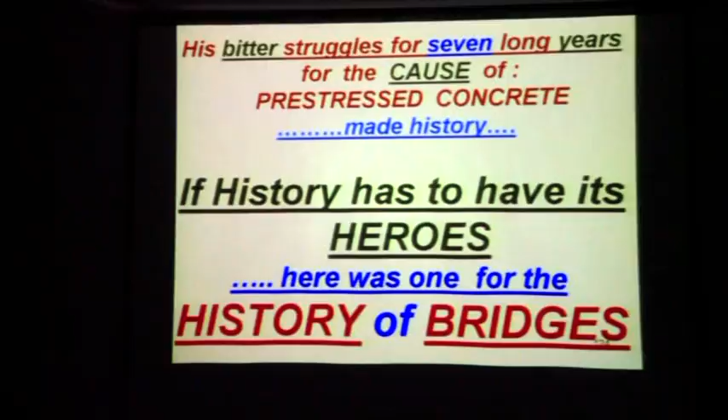Freyssinet took patents in 1928. He was out to sell history's most exciting building material, called pre-stressed concrete, but alas, with no buyers around. The same problem of mindset.

He reportedly told his friend Le Corbusier, in translation, 'I reached my goal, now I am looking around to see what I can use this discovery for, and who will accept it. How do I convince them?' These were his desperate words. And he continues: 'In my opinion, modern society needs it for all their housing and their highways.' This was back in the 1930s.

Corbusier was so touched by the sentiments of his friend that he concluded, of that one short sentence Freyssinet wrote to him, 'He has crammed a vast wealth of poetry, lyricism, solidarity and concern for mankind and for the hearts of human beings.'

In 1960, the beam bridge... can we stop this fellow? It's a little— which switch is this? I don't want to touch them all. I'm sorry, I would have done it, but I don't want to— don't switch off the computer. Oh good, you won. Thank you.

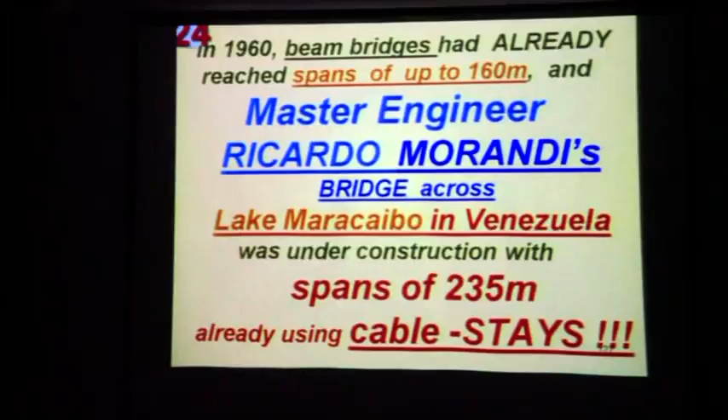And you look at this mastermind—the first person who did the cable-stayed bridge way back then, across Lake Maracaibo in Venezuela. The bridge across Lake Maracaibo, here it is, in Venezuela, was under construction with spans of 235 meters each, about 800 feet, already using cable stays then. Here is the great man.

Professor Morandi—these professors are practitioners more than teachers. They understand the ins and outs of what they are doing. This is his famous bridge across Lake Maracaibo in Venezuela.

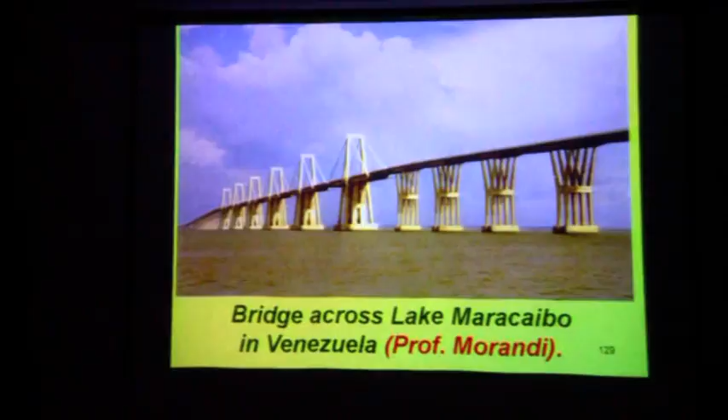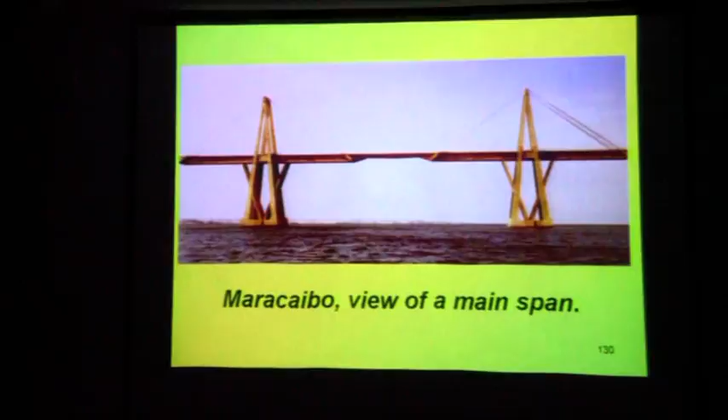This is his famous single-unit, single-element Maracaibo view of the main span. You can see how the stresses would flow: the live load picked up by the beams, picked up by the stays onto the pylon, down into the foundation. Everything is simply supported—not simply supported, but statically determined.

But that was not all—he did all the bridges along the west coast of Italy, on what's called the Sun Highway, the Autostrada del Sole. There are first-class bridges on that. Each bridge is different from the other, and each bridge is more complicated than the other.

Because it is coming from Morandi, nobody could question him. But these are things you can see for a lifetime.

You should go abroad. This morning we had a 1.5 to 2 hour session. I don't know how many of you came, but that's where I was explaining quite a few things.

Remember this, it's not the analysis that you start with. You give me a problem, and you straight away open your laptop and start. Don't do that, that's not the way practice is done. You have to conceive the idea, draw sketches to scale, then transfer those sketches to the drawing board, make them, chisel and chop them, cut them short here and there till it looks like something and you can see the stresses flow. Then you start the analysis, then comes the design. In doing so, you have to fix the cross-sectional dimensions first. That doesn't come by starting your laptop.

Now, why am I saying this? Let me first show you the next one. This is a bridge across the Paraná, the bridge across Chaco Corrientes in Argentina. You just look at this bridge. But the designer who had to conceive it, this is how the conception started.

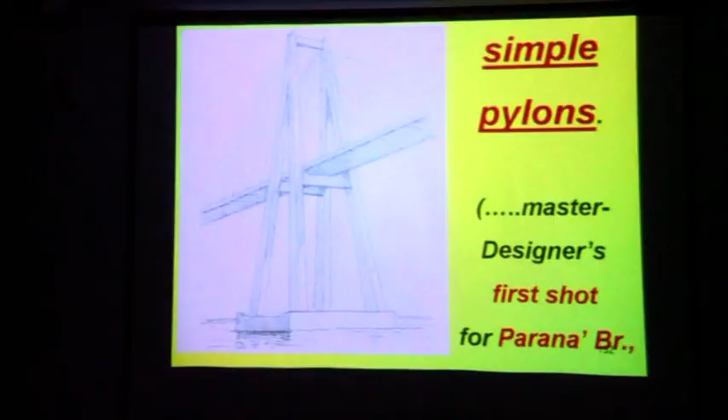That is engineering, not starting with this calculator. You will then begin to realize how the conception of structure and understanding commences. So this is what... I can't use your damn thing, this thing. This is how the conception started, and this is what he did. Just to transfer the idea that please, a computer pile of printouts is useless and meaningless. You have to understand differently.

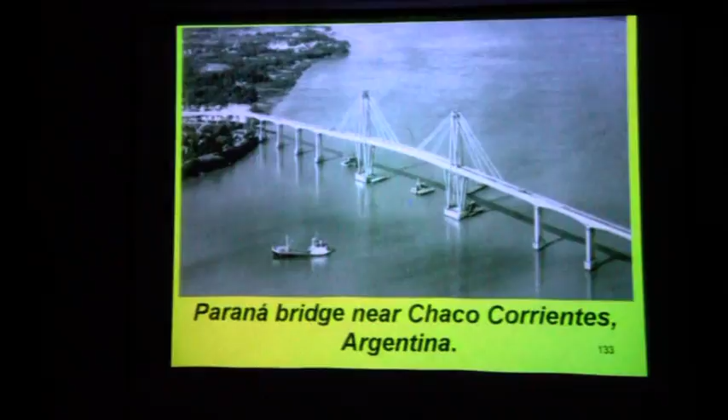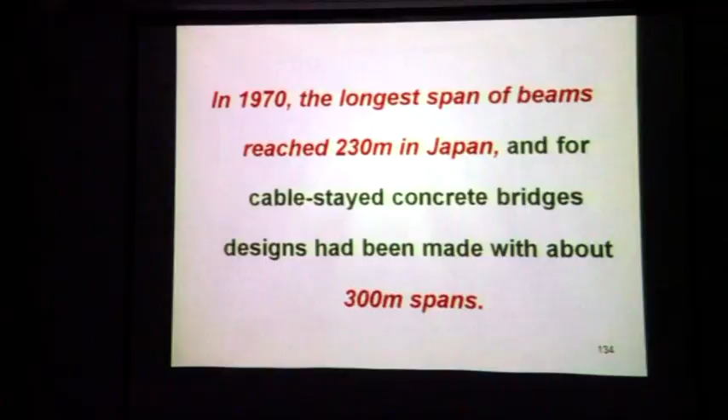In the 70s, the longest span of beams reached 230 meters in Japan. And for cable-stayed concrete bridges, designs had been made with about 300 meter spans then. Today we go up to 500 meters and even longer. But this was back in 1970.

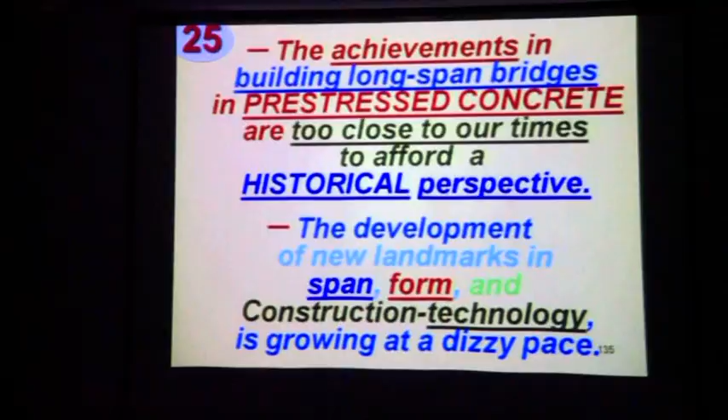The achievements in building long-span bridges in pre-stressed concrete are too close to our times. That is like yesterday, not good old steel bridges of wrought iron and cast iron. So it is not easy to comment on the bridges that have come up in our own, in the same decades as we are living. So that's why I'm saying the achievements in long-span pre-stressed concrete bridges are too close to our times to afford a historical perspective or comment. But the development of new landmarks in span, form and construction technology is growing at a dizzy pace.

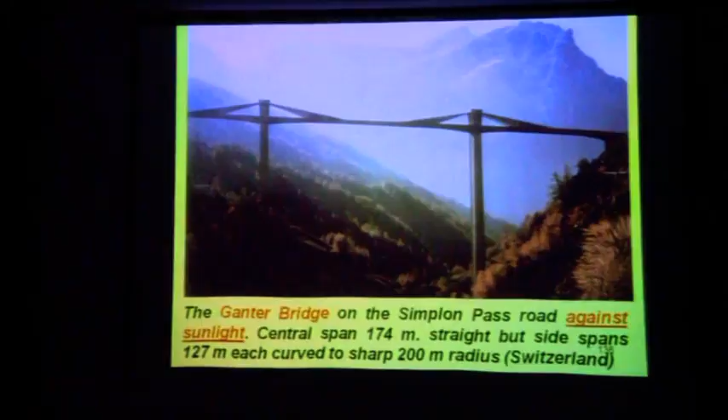Now you see, this is again Professor Christian Menn of Switzerland. This is the Ganter Bridge, Simplon Pass in Switzerland. If you look, this is a picture taken against the sun. If you see the same bridge along the sun, this is how it looks. And imagine if you see these two things this way or that way, when it is snow all around, you freeze. You just cannot do anything other than appreciate.

And he's one of the greatest analysts of the day, Professor Christian. I don't know whether he's passed away yet. I don't know when, but if at all.

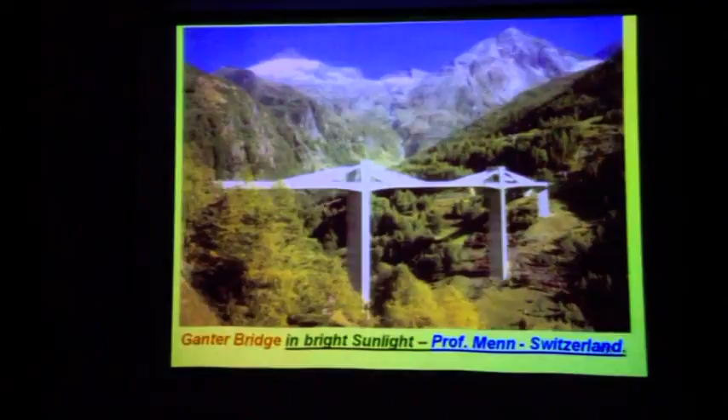Then this is one of the latest, Millau. I used to call it Millau till I was corrected. It's pronounced, I'm told, as Millau Viaduct. This is between Barcelona, between Spain and France, but between Barcelona and Paris. Now see this very carefully, this is not a joke. This bridge is something superb, absolutely superb.

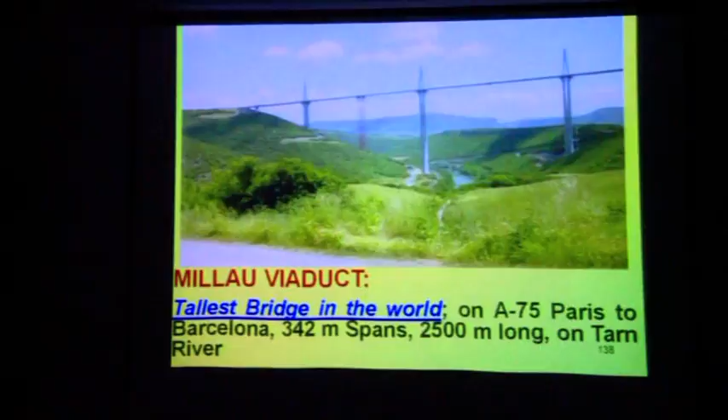This is across the motorway A75. Each span is over 1,000 feet, 2.5 kilometers long, and the pier height is taller than the Eiffel Tower. And I'll show you that. Now you begin to see what this bridge is. Now I'll show you a picture or two of this bridge during construction, above the cloud line.

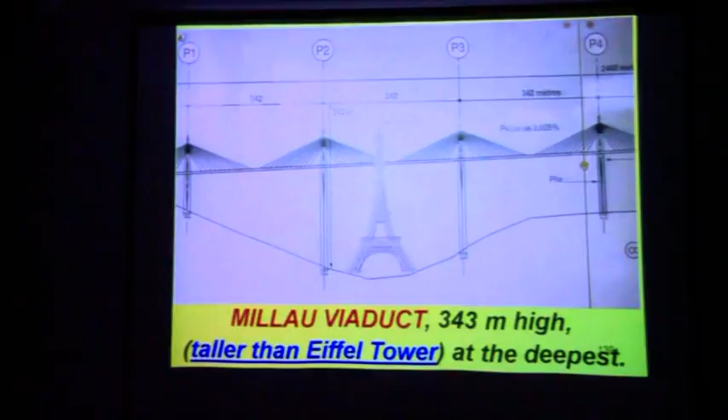Bridges is a great topic. Please take to it.

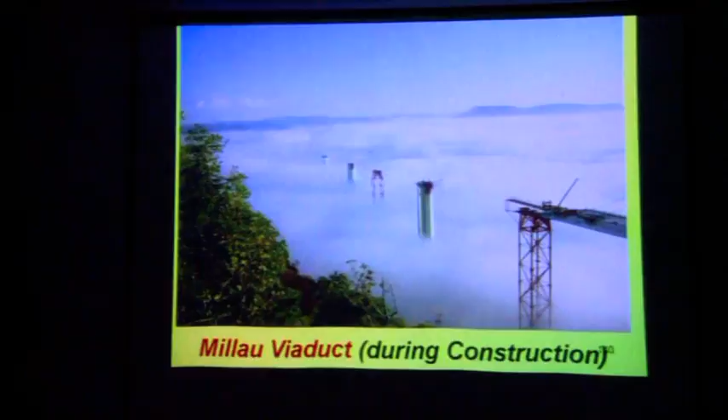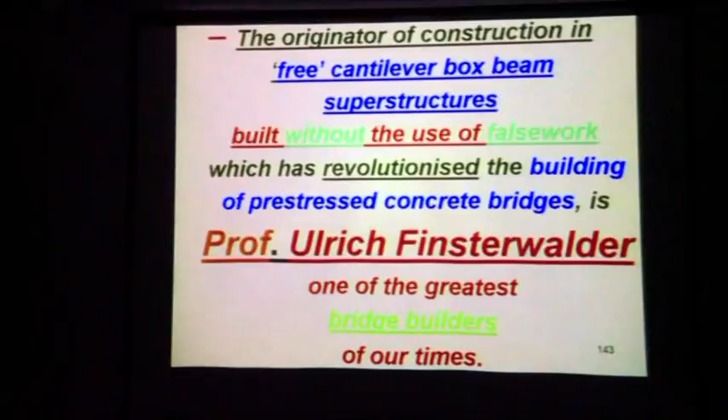The originator of construction in the free cantilever method—because if you have to cross bodies of water where you cannot raise the staging from bottom up, you have to do something else from the top itself. That's called the free cantilever construction method. The propounder is Professor Dr. Ulrich Finsterwalder, one of the greatest bridge builders of our times. Now, here's the great man.

A later modification: he would do segments on both sides, pre-stress them together, then again segments on both sides, pre-stress them together, and keep going outwards from the pier, doing the same from the next pier, until the two cantilevers would meet. But these were all cast-in-situ, cast-in-place segments.

Somebody else came later. He did the same thing, but converted the technology into using precast segments. That was Jean Muller, J-E-A-N, Jean Muller, a disciple of Freyssinet and Guyon's school of thought.

A later modification of this method, cantilever construction with precast segments, was introduced in '63 for the Choisy-le-Roi Bridge in Paris and the Oleron Bridge on the French coast—I will show you—by a contractor, which was a contracting company. The consultant was STUP, S-T-U-P.

It's an acronym—S stands for something, T for something, U for something. STUP Paris, which was owned by Freyssinet. Freyssinet was a great legend. He would give you the problem and he would give you the solution. He wouldn't tell you how, and he perhaps wouldn't even know.

But a great mathematician turned engineer turned mathematician named Yves Guyon used to be with him almost 24 hours a day. He gave mathematical proof of everything that Freyssinet propounded. And he married his daughter as well, because he was there for too long.

This was Jean Mueler. I've said it somewhere—most famous Freyssinet-Guyon method. In '63, the name of the company was Compenon-Bernard, that's the French company, operating under the most famous Freyssinet-Guyon school of thought for bridge culture and thought.

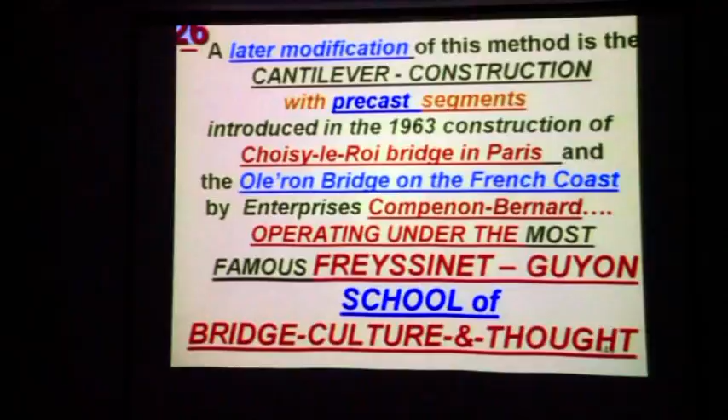This was done by Jean Mueler, who died very recently, 3-4 years ago. This is his bridge. When he lectured on this in England in 1963-64, I attended his lecture.

When you listen to people like these, you are transfixed, because they give you ideas which come into the codal domain maybe two decades later. Like, for instance, what is the creep loss difference between a cast-in-situ segmental construction and precast segmental construction, and the thickness of the joints—whether you should do mortar joints or epoxy joints. Epoxy came later; this was mortar joints.

And the deflection—you calculate in cantilever construction that as you build the cantilevers, they keep deflecting. You can't have a bridge like this, so you have to pre-calculate in advance the possible effect of creep in deflection and introduce those deflections in reverse. That's called the camber calculation. Even today, computers have to be used to predict the correct creep coefficient.

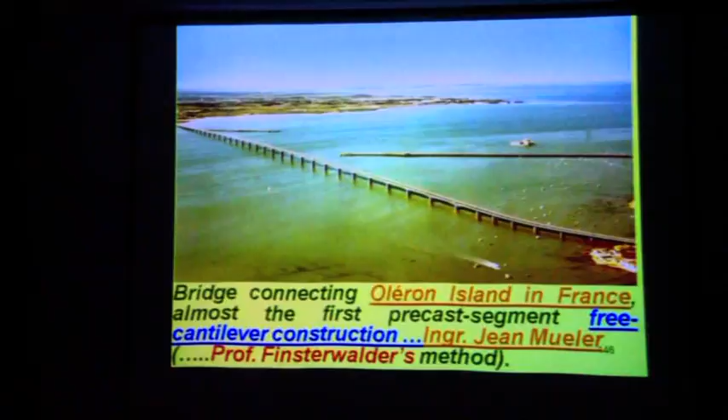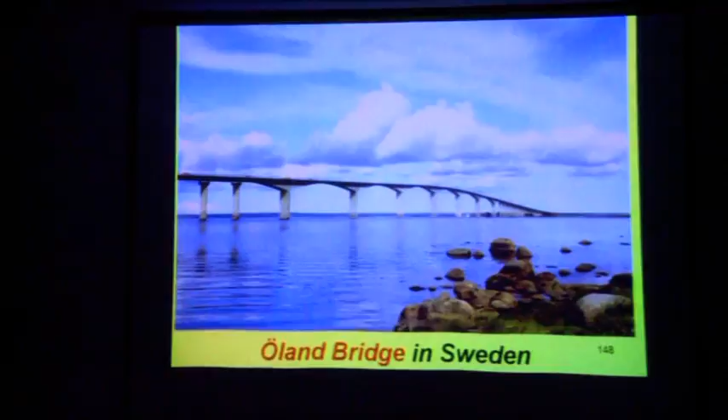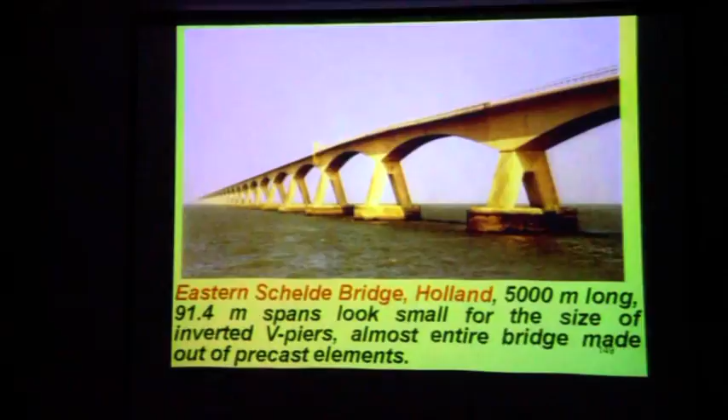This is the great Öland Bridge in Sweden, cantilever construction. No, this is the Eastern Schelde in Holland. This looks very massive, but mind you, each span is 300 feet—it looks massive because everything is so fat and big. Everything is precast: the piles are precast, the pile cap is precast, the inverted V-piers are precast, the deck is precast. You can see the effect of the double attack of chlorides and sulfates through the stain marks. Each span is about 300 feet, 5 kilometers long.

This is our own Gandhi Setu. There are many—hundreds in India now. This is the Patna Bridge, which is now in very bad shape. I don't want to say anything because I was also associated with it through governments.